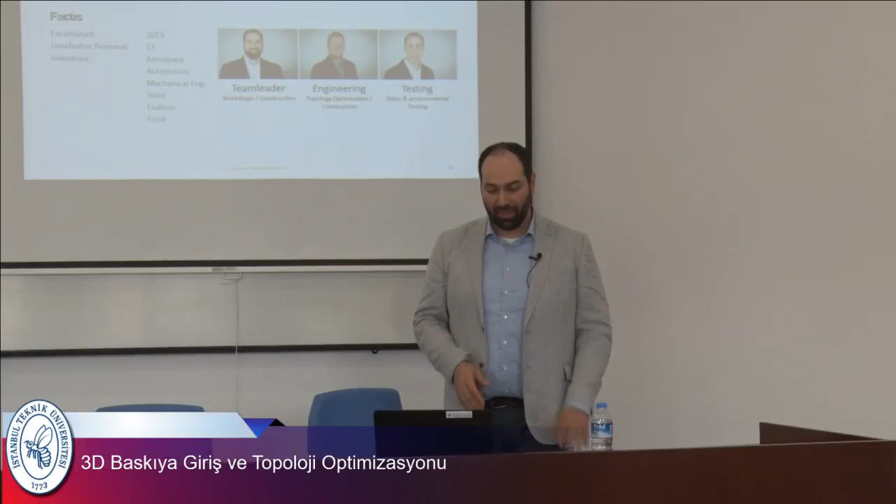I will give you a short introduction to how 3D printing works. Our services are split into 4 main parts. First, consulting, where we search for parts which are interesting for 3D printing, because not every part can be 3D printed, and sometimes it makes no sense to print it in 3D.

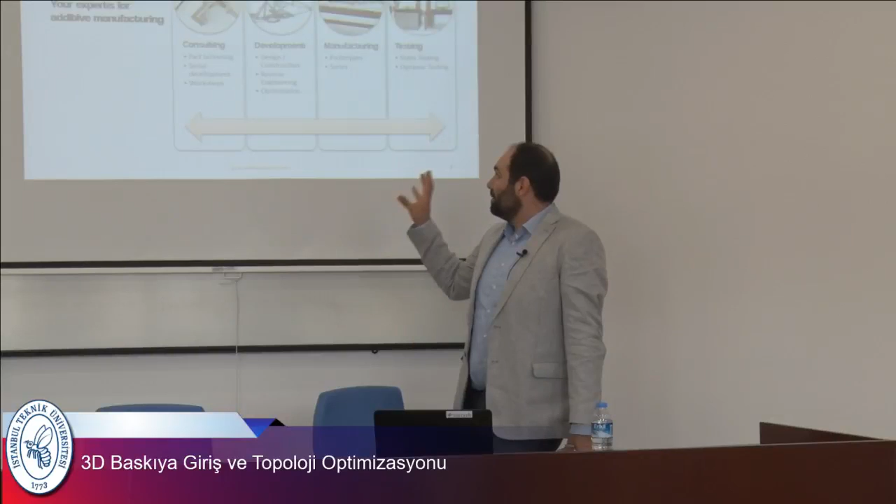We also do workshops and education, and we have development for design, construction, and so on. I will show you one part now and explain it in more detail later - this is a part out of the A380.

Airbus A380 - normally it looks like this, but it's broken in my baggage, so sorry for that. I will give it around. It's made of plastic; the original one is in aluminum. I'll give you more details later, but you can pass it around for now.

So what is 3D printing? In the end, it's not that complex. You're laying thin layers in a two-dimensional way and building a part up, constructing it layer by layer.

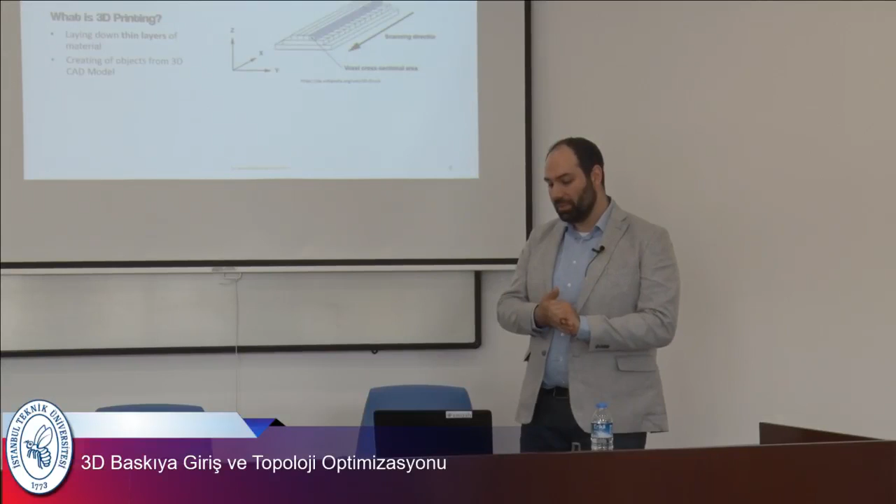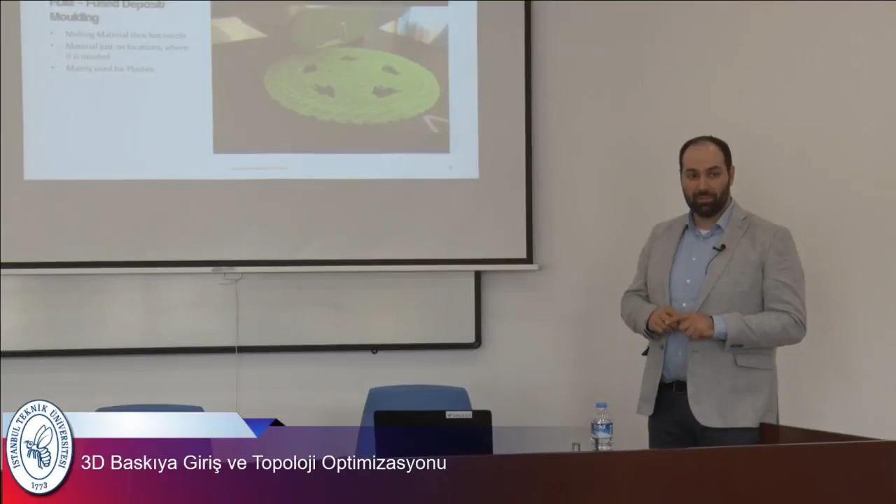To show you this, I have a little video, shown very slowly just to demonstrate how it works. You have a hot nozzle where you put plastic through it - has anyone of you ever used a hot glue gun? Yeah, so it's nothing complicated. You have this nozzle, you heat up the material, lay it down, let it cool, and lay another layer on it.

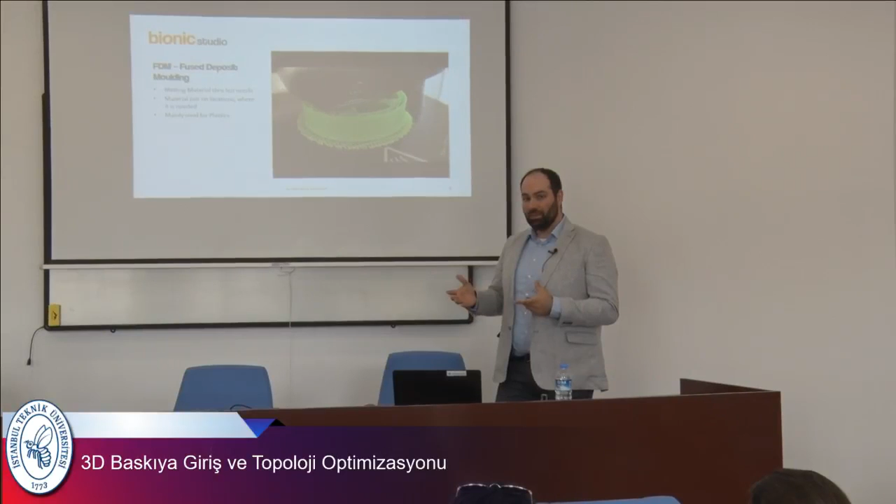If you do this layer by layer, you build a wall. In this case, I think it's a part of a tire, and you put material on the places where you need it. So you have subtractive manufacturing, where you do milling and drilling, and you have additive manufacturing, where you put material only where you need it.

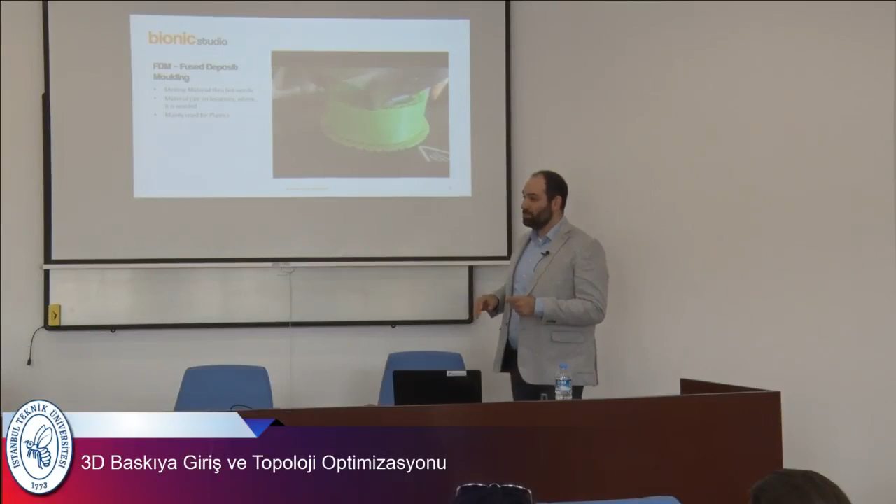This is one of the techniques, called FDM, fused deposition modeling. There are a lot more - another one is selective laser melting.

In this case, you have metal powder or plastic powder, and you shoot a laser at the places where you want the metal to be melted. You're doing this also layer by layer, and building the parts up.

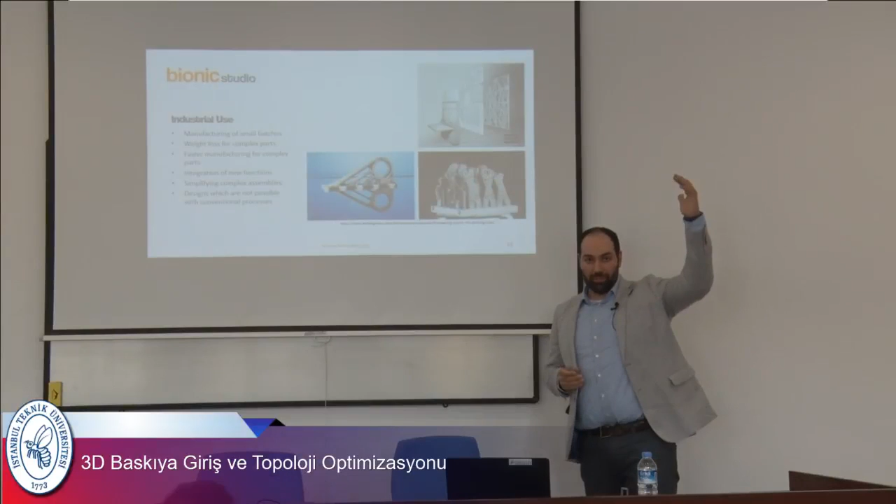You see here another part—this is the bionic partition. This was done together with the company Autodesk, and it's a wall which is quite high, around 2 meters, printed in parts. You see here the parts, and they connect it after the print.

Some advantages here: we have the manufacturing of small batches, and we can lose weight—for example, in this case it's around 30%, in this case around 40-50% weight loss. We can manufacture faster, more complex parts, because if you think about producing something like this conventionally, you will never finish it, or it will be really expensive.

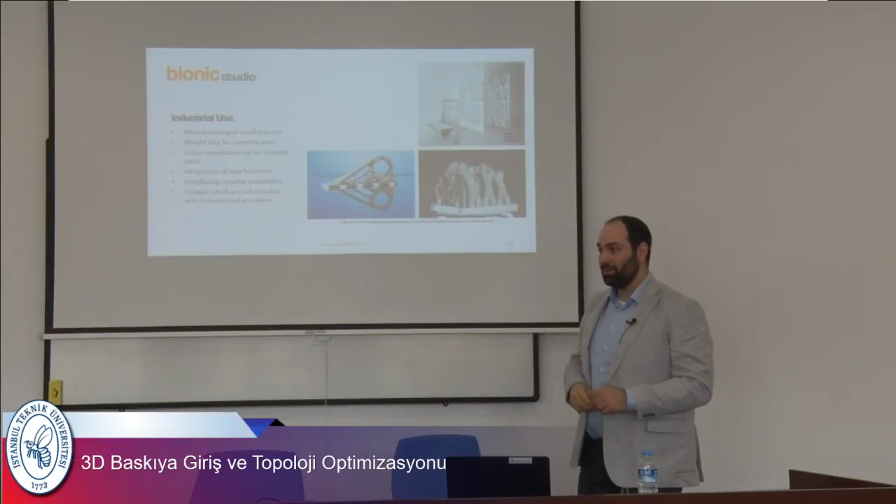You can integrate new functions, so it's no matter if you put a hose or something in it, and you can guide hydraulics or electronic cables inside, and so you can integrate these functions. You can simplify the design, and generally you can design stuff which is not possible in a conventional way.

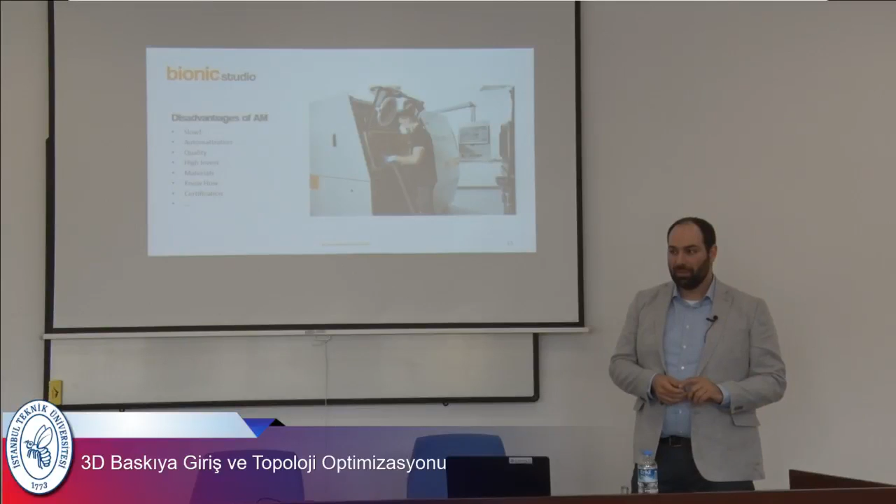But there are also some disadvantages. So this technology is really slow. To print something like the part which is going around, it takes on a normal FDM printer around 2, 3, 4 days. It depends on how good the quality should be.

And the second thing is the automatization. So you see the guy who's there with a sucker and sucks the powder out, having a mask on, and it takes time. So it's not a really automated process. Most companies are trying to automatize it more and more, but it's not like a milling machine which is finished and there's a KUKA robot which is touching this part and bringing it into the next. So this is not working right now for 3D printing.

And the quality, and if you see the part, I mean, this is a cheap printer. It's an FDM printer that we use, but it has not a good surface quality, and it has not the stability, and of course also the reliability. So it's not that you're starting one print in 2 different machines and you're getting the same results.

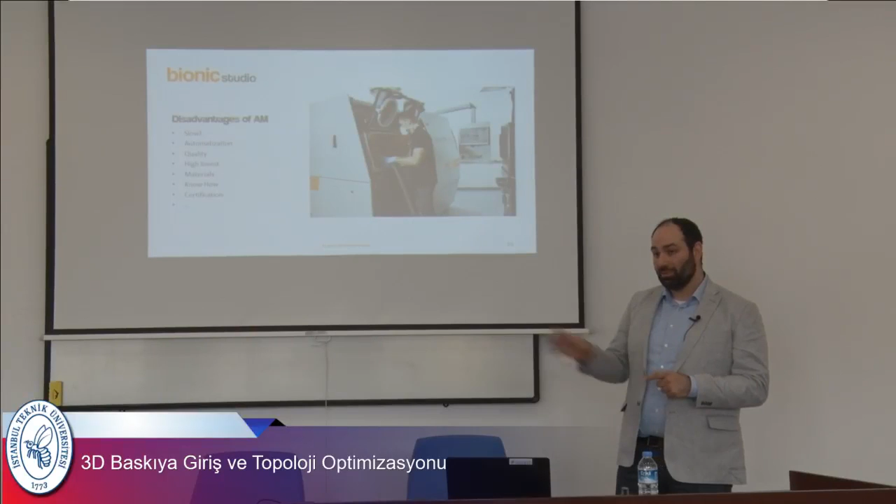You have a high investment, so for these machines you have to think about 500,000 euros and more, and the know-how. So the first thing I did before we started with 3D printing in our company, I just ordered 3 3D printers and told our employees, please, you can use it for whatever you want. You can use it for home use, you can use it for work-related stuff, whatever. And it was not that they started with it and directly got a part out of it.

So you really need a lot of know-how to understand how this stuff works, and how you get parts in a good quality and in a good time out of it. So especially for metal machines, most companies are saying you need 1.5 years to understand the technology before you can sell the products out of them.

And the certification. So in the aerospace field, it's quite interesting to have a certified part. So you need a certified material, you need a certified machine, and a certified process. And all the stuff is not done right now. It's not that you're buying a book and taking a look at it and know how the drilling speed should be and how the milling speed should be and whatever. This is quite experimental right now.

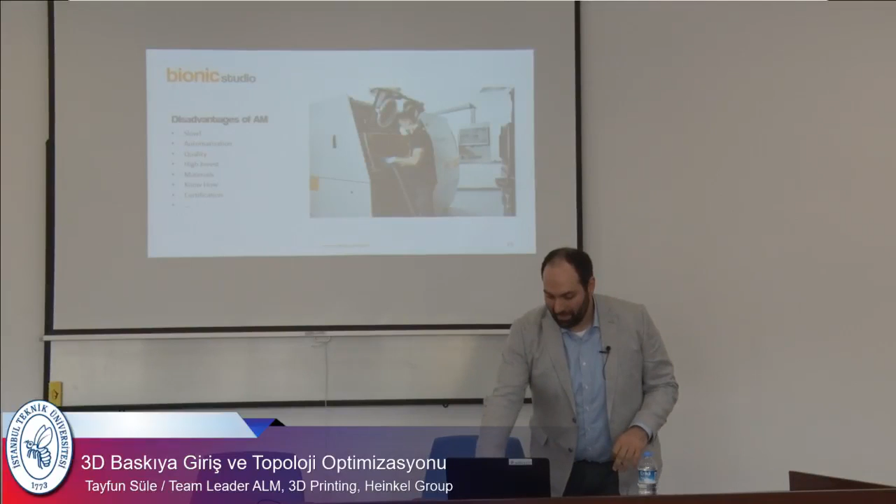The question is now, why are we doing it? Some of the advantages I already told. So the one thing is you can produce data out of the CAD work you have done. It's not that you have to switch it to a CAM language to feed a milling machine or whatever. So you can directly use your CAD files, put them in a 3D printer, and print.

In small batches, as I already told, reducing the development time. So you can produce different types of product in a very short time and test it before you're going to do it bigger. So you can reduce your development time with this. You don't need tools. So if you want to produce a plastic mold or something, you need time and money for it, and this 3D printer doesn't need molds or tools.

And one of the main things is you have the geometrical freedom. So you can decrease the weight, you can increase the functions, you can build up complex structures, and you can substitute parts. And this is the reason why I show this part, which is going around right now. These are 5 parts that you are able to substitute.

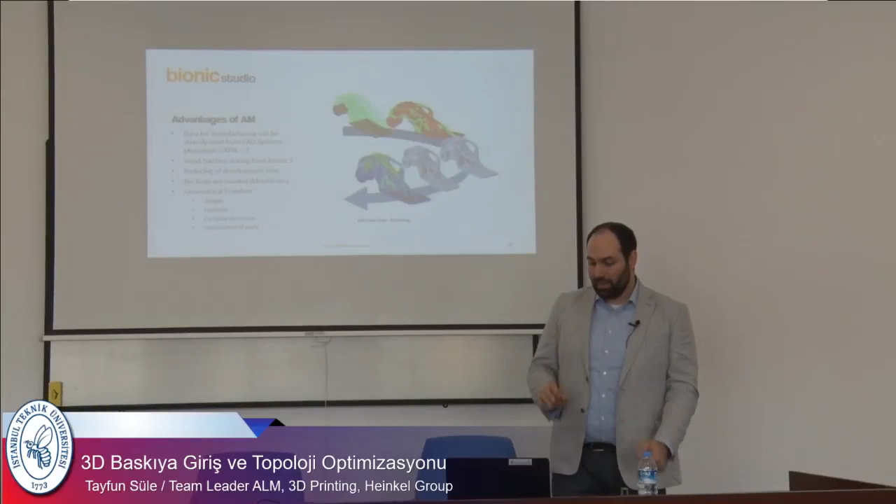Some people ask me a lot if the 3D printing machines will substitute the milling machines or the drilling machines and so on. My feeling is that it will never substitute some other technique. It's just a new way to produce something. And let me show you this.

So if you have conventional manufacturing with milling, for example, if you produce a plate, it's really easy. It's not that complex, and the price is also not so high. But if you want to produce something really complicated, the price is going higher and higher. For additive manufacturing, there's nearly no difference. For the 3D printer it doesn't matter how complex the part is. So you always have to think about which way you go, and you have to compare: is it better to print it, or is it better to mill it?

And at this point where both lines are crossing, you're starting with what we call complexity for free. So from this point on, it doesn't matter how complex your part is going to be. You can print it because it's mostly cheaper than creating it the conventional manufacturing way.

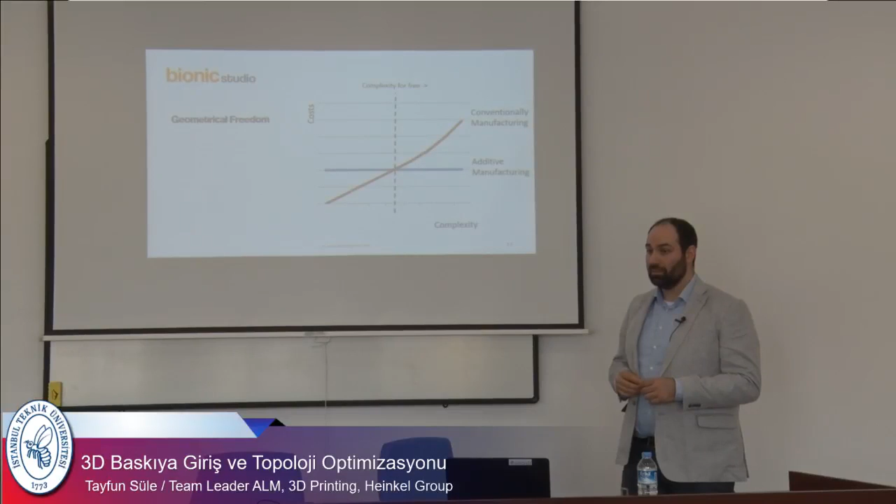Let's come to this part. I will show you one example. Most examples I cannot show to you because we are just an engineering company, and customers come to us and ask us to help solve their problems. So we don't have our own products. So this is something out of a bachelor thesis. And this part is hanging in the A380. It's on the top, and it's holding the oxygen boxes, which you have over your head.

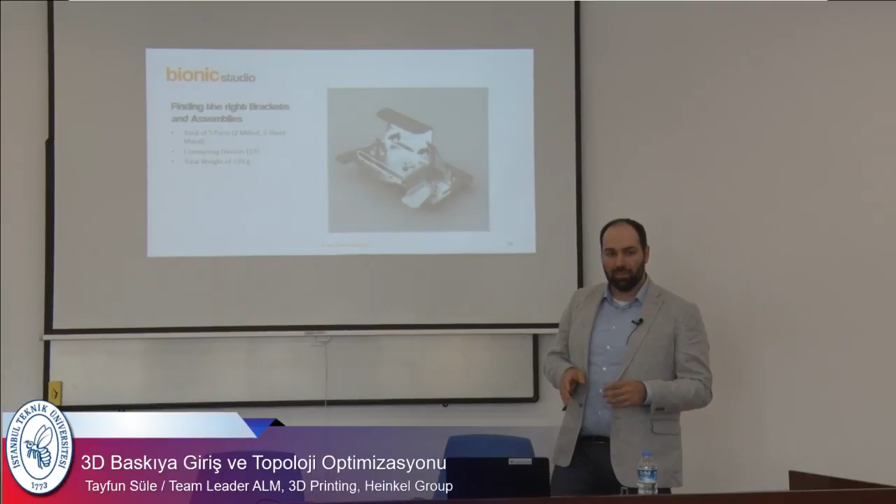And it's 5 parts. 2 of them are milled parts, 3 of them are sheet metal parts. And it has 17 connecting devices, like rivets or nuts and so on. And the total weight is 239 grams, originally from aluminium. And just to keep it in mind, the price of this part, complete, is around 60 euros, just for the parts themselves.

And what we do first is a topology optimization. I think you already had contact with topology optimization a bit. Has somebody of you heard of topology optimization? You also? Okay, a few of them. I will show you a few examples later. So what we do in topology optimization: I will go one back. We have this part which is really complicated. It is connected here and it has connections here and so on.

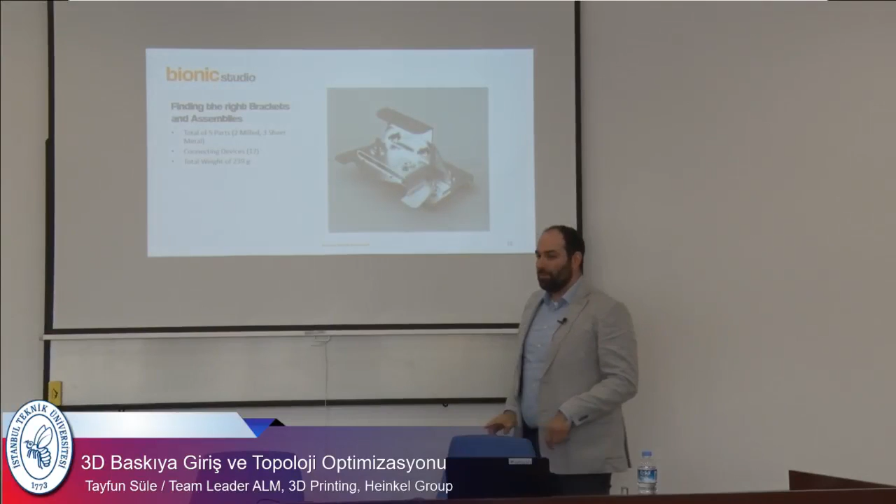And what we're doing first is to create a design space. We will do it later on an example. So we create this design space, this grey area. And the yellow areas are areas where we're telling the program that these areas can't be changed because there's a force on it, there's a connection on it, and it must stay for quality reasons or whatever. And this program is doing one thing: it's thinking about how the forces can flow through the model to the points where it's needed.

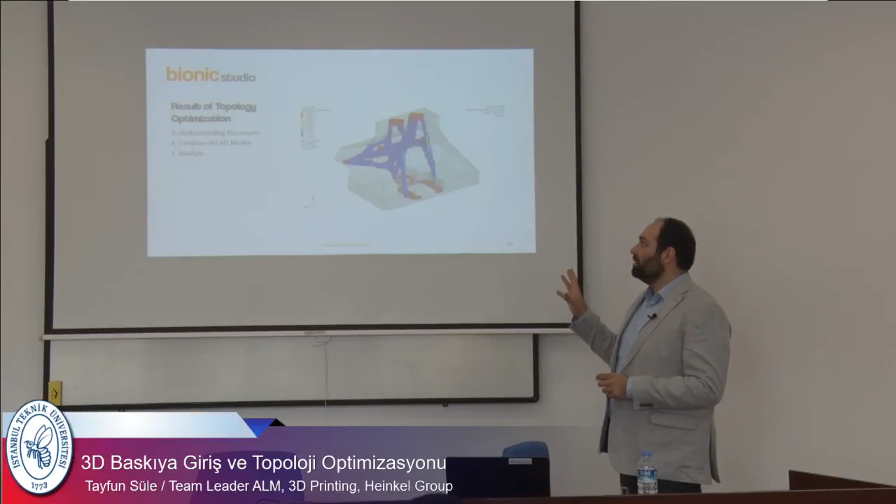And mostly something like this comes out. This is what the topology optimization gives us as a result. And from this one, we can start to create a CAD model. And this can look like this. I have it here with me. It's an aluminum part. I will also pass it around.

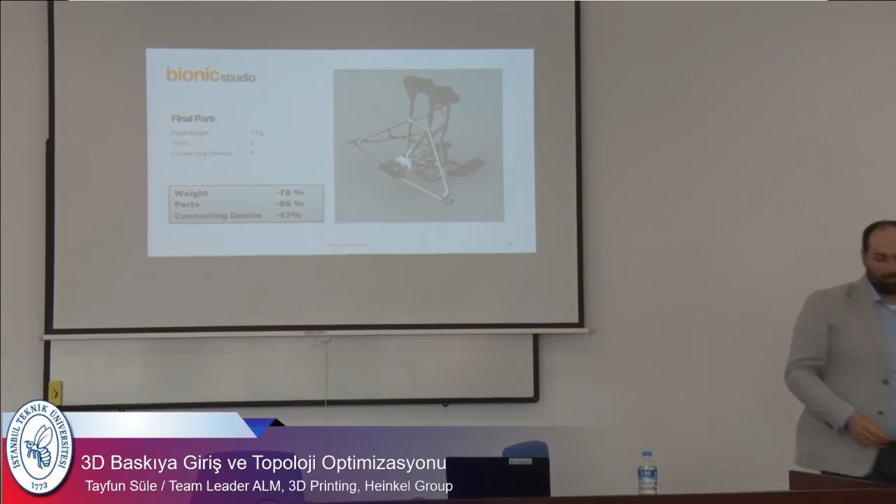So what we have done is we substituted 5 parts with 1. So we have just 1 part, and it's just 53 grams. In this case, we save nearly 80% of weight. We save parts and connecting devices, so we have fewer connections. But the cost of this part is around 120 euros. So it's double the other parts.

What you keep in mind then is there's no guy sitting there assembling all the parts together. There's no one trying to take the tolerances and check if everything has the right tolerance and so on. You have less logistics, so you don't need to order 5 parts. You just have to order 1 part. So if you keep this stuff in mind, it can be that this part is cheaper than the old one. So this is the reason why it could be very interesting.

And yeah, let me think about it.

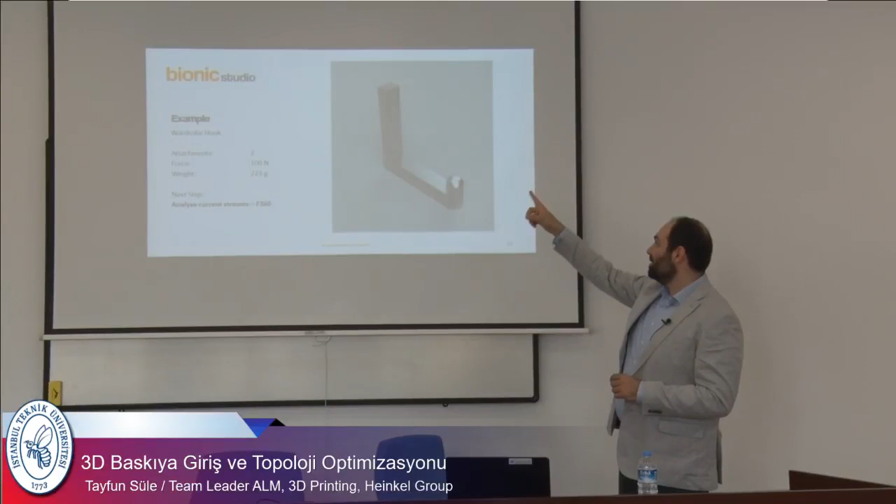Then let's come to the point where we have a little example. The flight from Hamburg to Istanbul is about 3 hours. And in the plane I was thinking about a wardrobe hook, where you put your jacket on. And I designed this wardrobe hook, and I was thinking, okay, it has 2 connections. We have here a force of around 100 newtons, and we have a weight of 200-something grams.

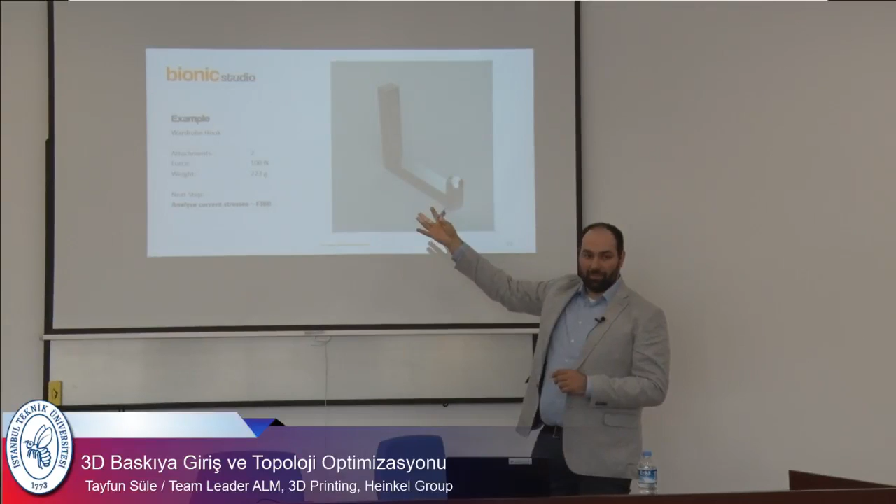And I will switch now to Autodesk. Just a second. Has someone of you already used Autodesk Fusion 360? You used it? Does someone of you know Autodesk Fusion 360? A few more. Okay, it's quite an interesting tool because there's different stuff you can do. I'm sorry because my version is in German, but I will try to explain it.

So we have the model component where you can design something. You can design shapes. This doesn't matter for now. You can render stuff. You can animate stuff, like an explosion view or whatever. And then you have simulation, and this is quite interesting because most tools, like for example CATIA, don't have everything inside. What kind of software are you using for design or analysis? Can someone tell me? SolidWorks. Tinkercad. CATIA maybe also, or Siemens, maybe Siemens NX. Okay.

The good thing with Autodesk is you can have everything together in one program, because previously we had to design something with CATIA, then export it, put it in Patran Nastran to calculate it, then put it back in Siemens NX for the final designs, and it always depends on our customers.

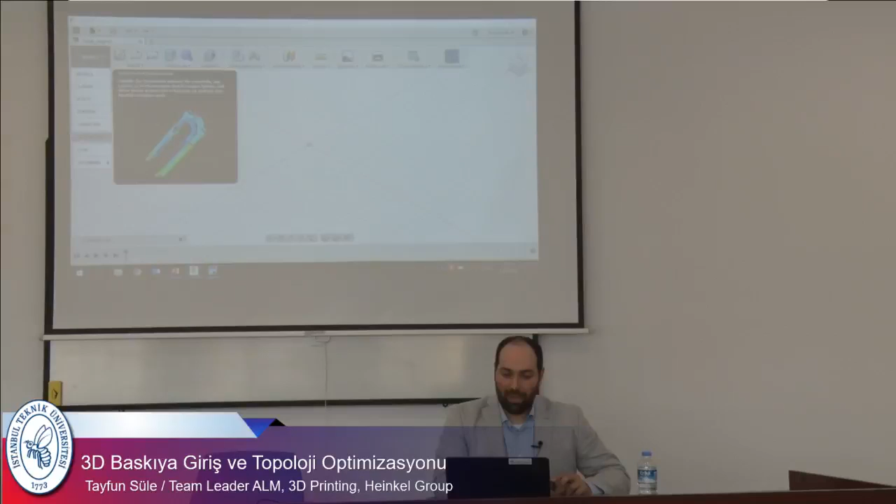And what I'd like to do from scratch now is to create this wardrobe hook. It's quite easy. So we have this sketch tool, choose a plane. I have to say something first. I've been using it for half a year, and I never got a workshop or anything on it. Everything I know I've done on my own. So it is maybe showing how easy this program works. So what I do here now is to create this wardrobe hook.

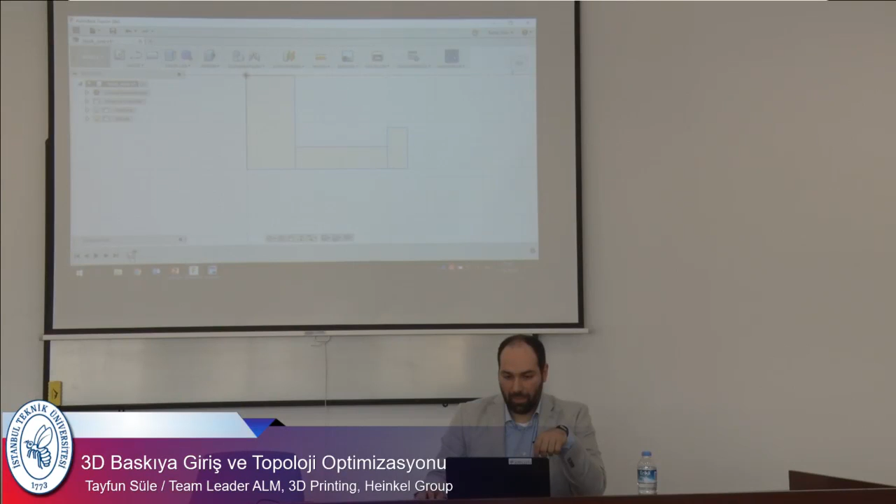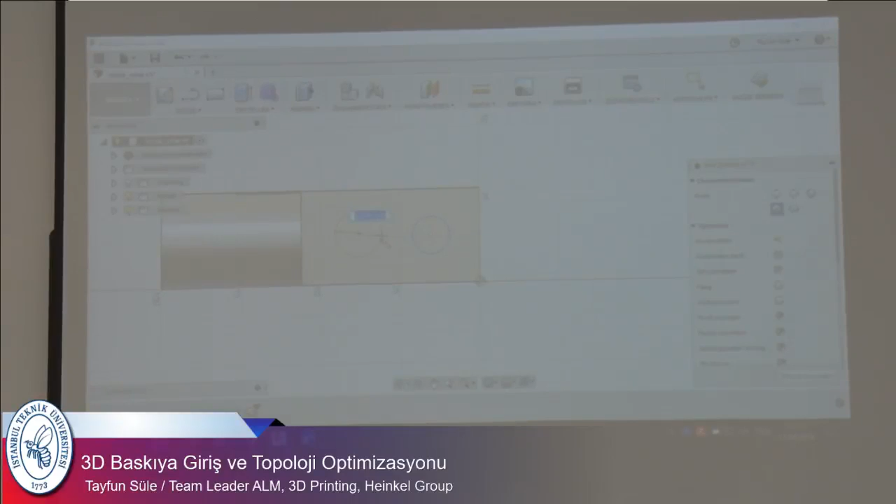Maybe a bit too much. So, and it's maybe not. And then we need 2 holes here. It's not symmetrical, sorry for that, but it's just to show you quite fast how it works. So, finished.

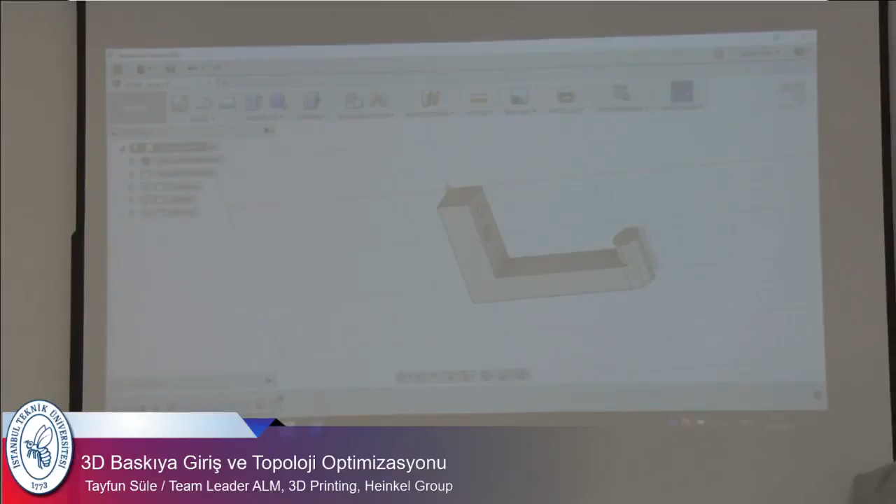Who was it who used CATIA? You use CATIA. How long do you need to do this, same operations? 3 minutes, okay. I've done it in 40 seconds. So, and it's a really easy part. So it changed a bit the way of designing something. It's not as complex as other programs.

And this is quite interesting for us because our engineers are mainly calculating something, doing CAE analysis and FEM analysis and so on, and they don't have an idea how CAD works. In our office, one side of the office is doing design and the other side is doing the calculations.

Previously the designers designed something, gave it to the calculators, and they said, oh, it's completely shit what you have done, and gave it back to the designers. Then we had these loops, sometimes 3, 4, 5 loops, and they don't really speak with each other. What we have done now is to give them Autodesk Fusion and tell them, it's quite easy, put your design on it, do a little calculation so you have a first idea how it works. This is working quite well, and we're turning fewer loops.

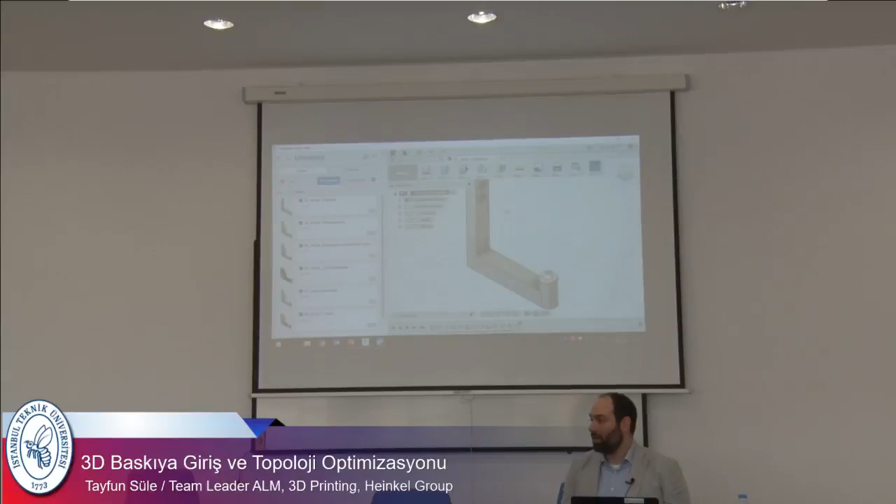And I will go back to the presentation. The next step would be to analyze this part. I will open the next version. So we have here this original. Why do we analyze this original part? We'd like to compare it later with the 3D printed part. So here's the part again.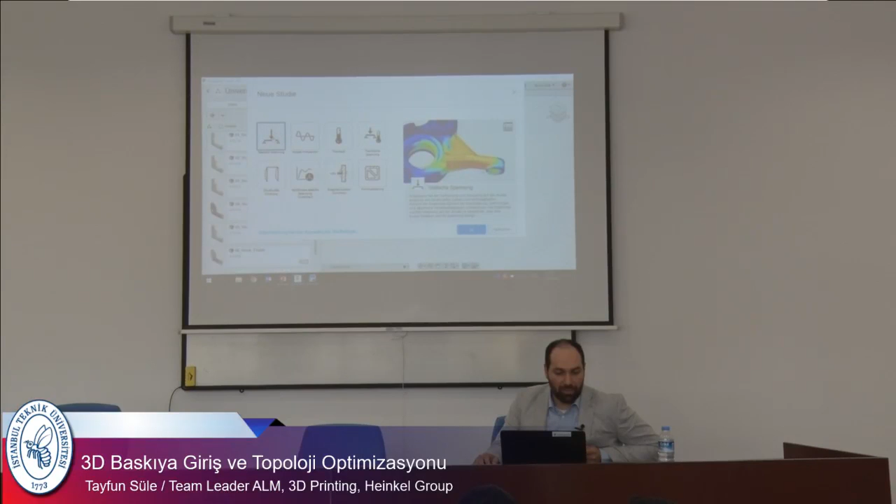To analyze something, we can go to simulation, and you have different types of simulation. You can do thermal analysis, you can calculate the frequencies, nonlinear stuff, and also topology optimization, or you can do the normal static analysis. And this is what we would like to do now.

In this case, we're starting from the left. So first we have the material. There are a lot of different materials inside. You can change it to other materials. You can create your own materials. I will leave it like it is.

Then we have the boundary conditions. In the end, we have here both rivets. We can just use them to create boundary conditions. In this case, it's fixed in all directions, so UX, UY and UZ. There are also possibilities to create boundaries which are sliding or fixed at a degree of angle, and then we have a force here.

It's the next one. We can just choose this one, and we say this is 100 newtons, and I will change it a bit. So 5 degrees in this direction, 5 degrees in this direction, because you never pull on a hook really straight in one direction.

And right now we have more parts. I will show it to you. So this is the body. We have the hook here in the front. You have hole 1, hole 2, and this is the topology optimized area.

And we're doing this contact simulation. So it is automatically creating a mesh between the parts. And then you can go to the results, and it's also quite interesting. You can do the analysis in the cloud, where there are really big computers. I think it's Amazon services or something. So you have a lot of power, especially if you have big calculations. In this case, I will do a local analysis because for this case it's totally enough.

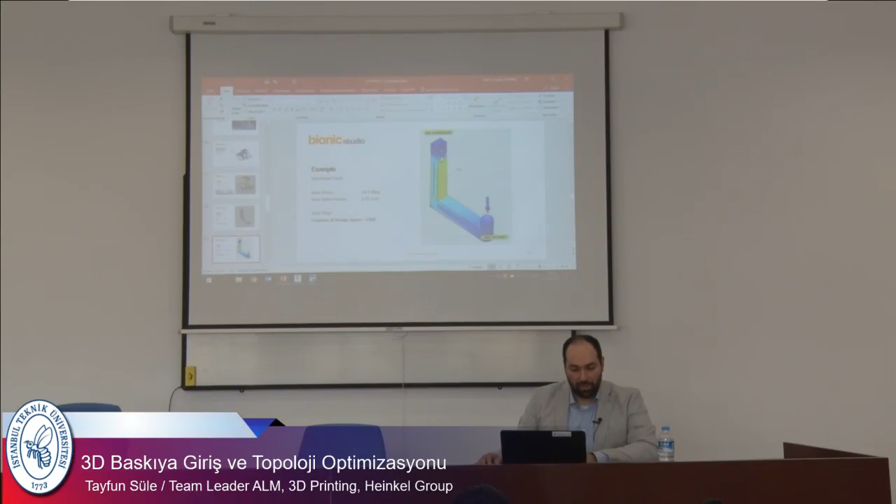If you'd like to do a topology optimization right now, we need to know that we are able to find a way for how the force goes from the attachments to the point where the force is introduced. And usually you have more space which you can use for the design space. So like for this bracket, what you saw before. In this area, for example, are some cables where you cannot create a design space, but in this area you have a lot of space where you can change something.

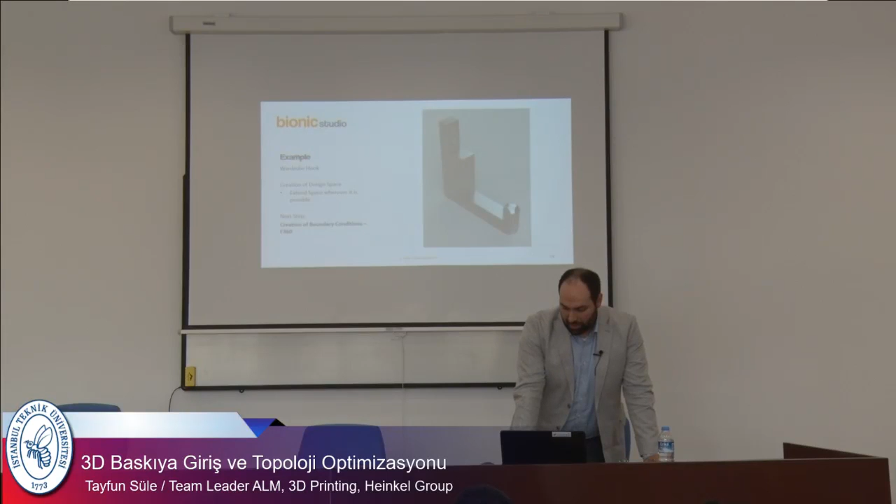And to do this, just a second. For example, I was just thinking about something like this. So we can just extend this surface. By creating... so now we have a bigger area.

So, for the topology optimization, it's the same as for the analysis itself. So we have to create the boundary conditions first. We go to simulation again. In this case, we'll do a new study and say topology optimization, and we're starting from scratch again. So we have the materials, I'll leave them like they are. We have the boundary conditions. It's the same as for the other one. And we have the force here in the front. Again, 5 degrees. Okay.

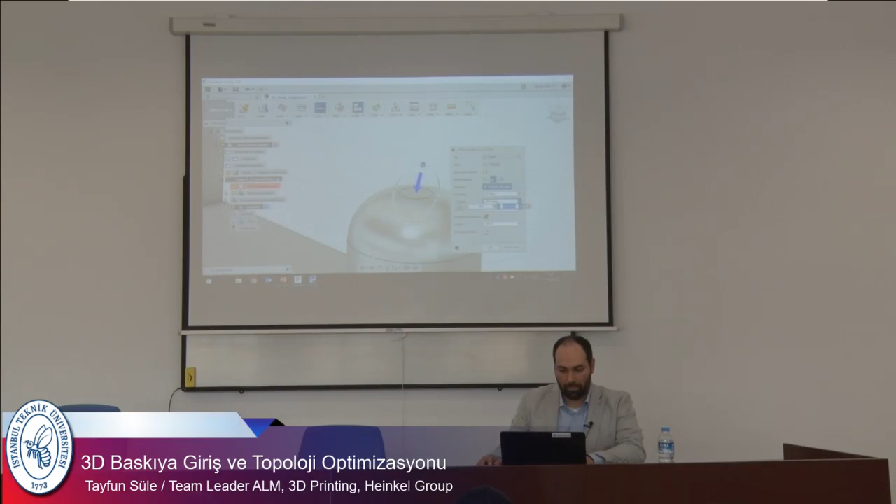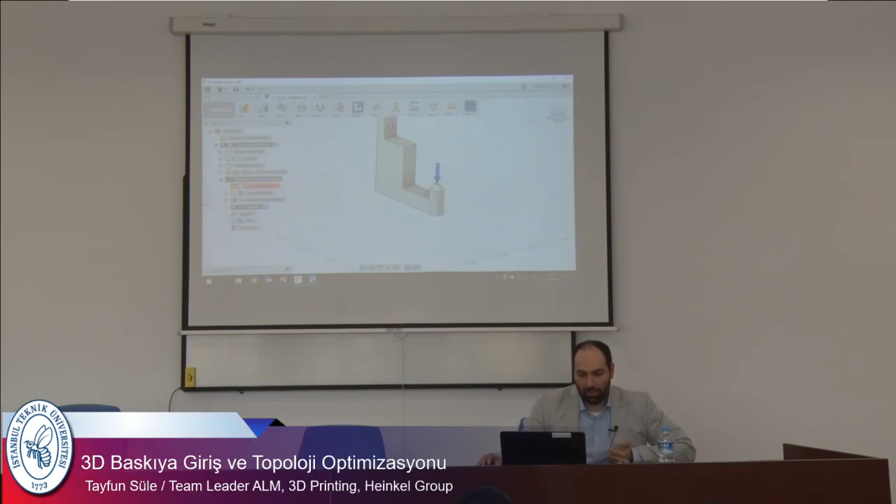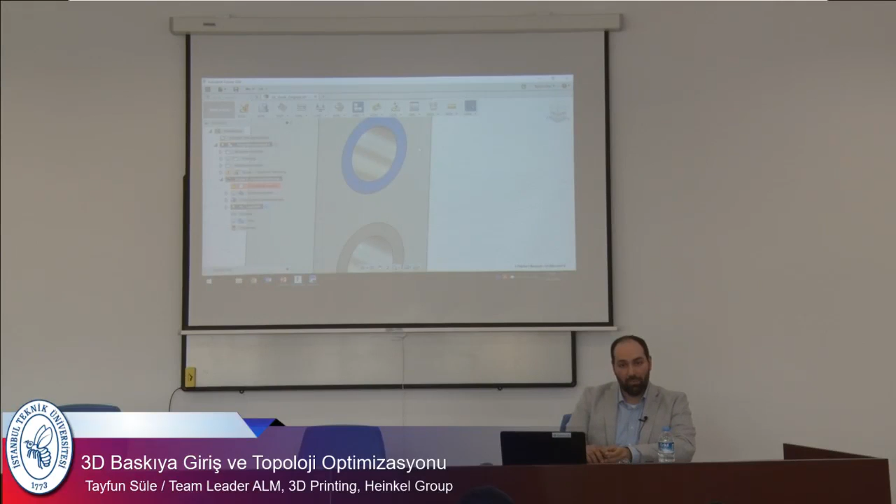So, this is already created. This is the force. And maybe you ask yourself why I've split the holes. There it is. So I split the holes in two parts. So we have this one part and this one part. The reason is, if you'd like to do a topology optimization, it goes through the whole part which you set as the goal. And to set up the goals, or to tell the program what it should optimize and what not, we have to give it a goal. So we're saying that this part can be optimized, and the other part should stay like it is.

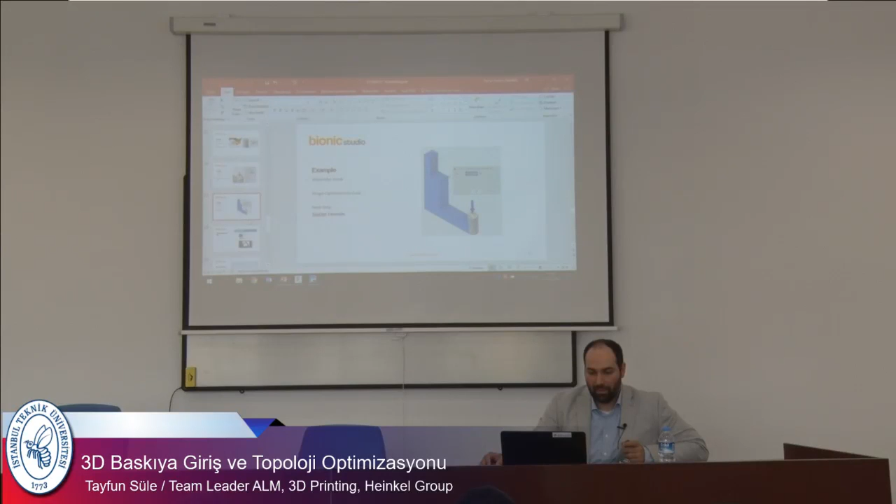And if you choose this one, you're basically finished, and now you can choose to calculate it. In this case, it must be in the cloud because it's a really high and complex calculation running in the background. And I've already done it, but before we do it, just a second. I'd like to show you something about topology optimization.

I think every one of you has a smartphone. Do you know the app TopOpt? No? If you like, you can just download it. It's free, it's quite easy, and it's not so big, so you can download it very fast. And we will do a little example on your own, and we'll see if everyone can imagine what it brings. So topology optimization, if you see it like this, it's quite easy.

So there are different methods of topology optimization. If you have a box full of little squares, and you're applying force to one side, and maybe some of you have already seen results from an FEM analysis, where you have blue areas and red areas. So the red areas are critical areas, the blue areas don't have force on them. And this method for topology optimization is called the SIMP method.

It's trying to find the areas where no forces are attached and give the expression in densities. And it's doing it in very few steps to create a part which is just withstanding the loads on this point.

Has someone of you already downloaded it? Yeah? No? Okay. If yes, this is the optimization task. So it's quite easy. I think every one of you has done it already. So we have a fixed point here. We have a point which can be movable here, and we have a force attached to this point.

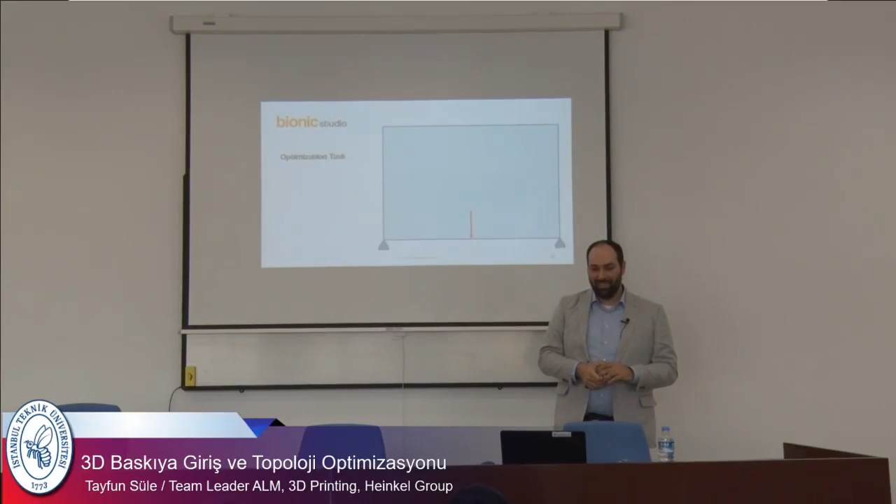And if you run this problem with this program, it will automatically give you something like this. And this looks quite like a bridge. And topology optimization is also nothing new. They have used it for years, but now it's possible to create parts which are really complex with a 3D printer. And there are already some companies which are trying to build bridges with 3D printers. It's quite interesting to see, but this is a bit too big for this, I think.

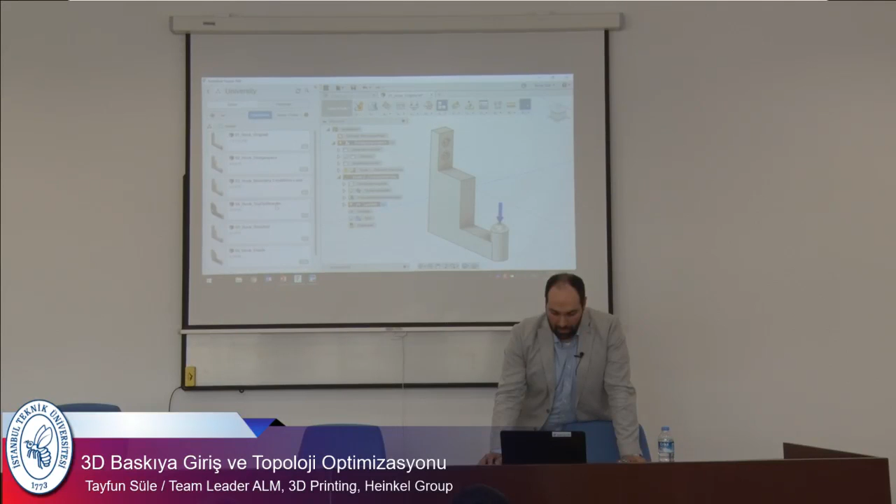And you can play around later. I will give it in a presentation. So, let's assume the boundary conditions. So after you created this topology optimization, you will get something which looks like this.

So in the end, we have this whole area where this topology optimization can create something, and in the end it says we don't need material on this corner, we don't need material on this corner, we don't need material inside. And if you turn it a bit, you can also see there's not much in this area. And also the connection to the hook itself could be much less. And what you also see is there's no material connected to the upper hole. And this is an indication that maybe it isn't needed anymore.

So this is also what we see a lot, that for some parts there are a lot of connecting devices to the frame or whatever, and mostly you don't need them. It's just because someone is saying maybe it could be needed. But in the topology optimization, you can see it quite well at this point.

And what we do then is to bring it into the design, and we can leave it like it is now, but it doesn't look really good. So if you give something like this to your customer, they will say, okay, nice, but it looks really terrible. It has holes inside, and it's not straight, and our customers won't like it. So you have to create a good design then. And take a look at it here.

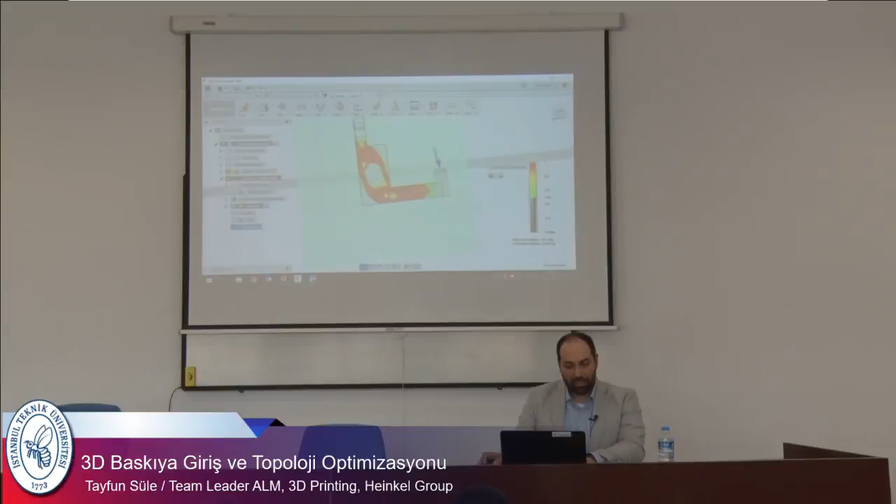In Autodesk, I will just show you very fast how it works. So you can just create a plane. Just a second. So now we have this first stuff, and then we can go through it and create.

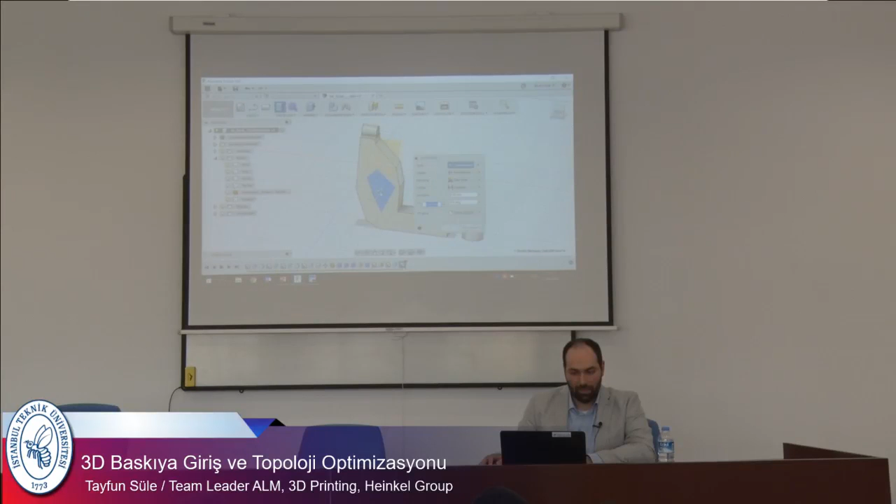It doesn't look really good, but I have a prepared version, so you can go on like this, and I will open the prepared version. This is what I have done in the plane. It looks like this, so it's empty here.

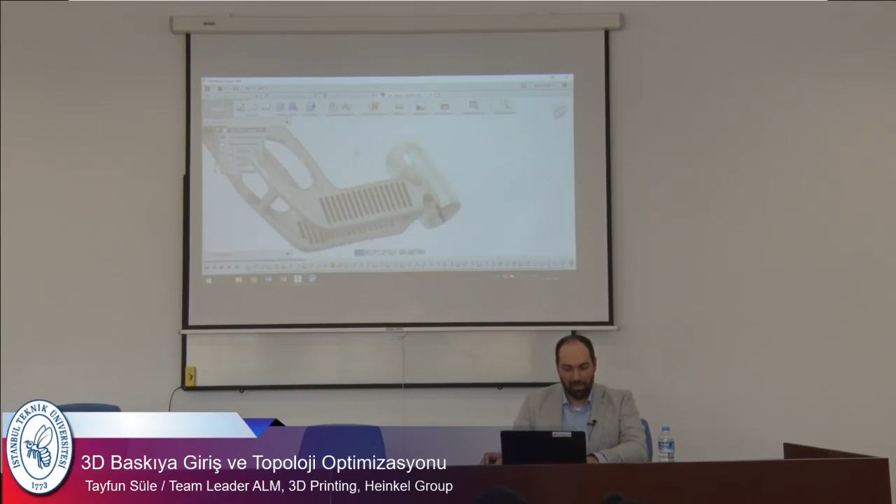It has this connecting here. Did any one of you already create a CAM routine to mill something? Maybe not, okay. It's quite interesting because when you think about how to produce it in a conventional way, there's no way to go inside this part and mill something out here, and also this area, so it's not really easy to do.

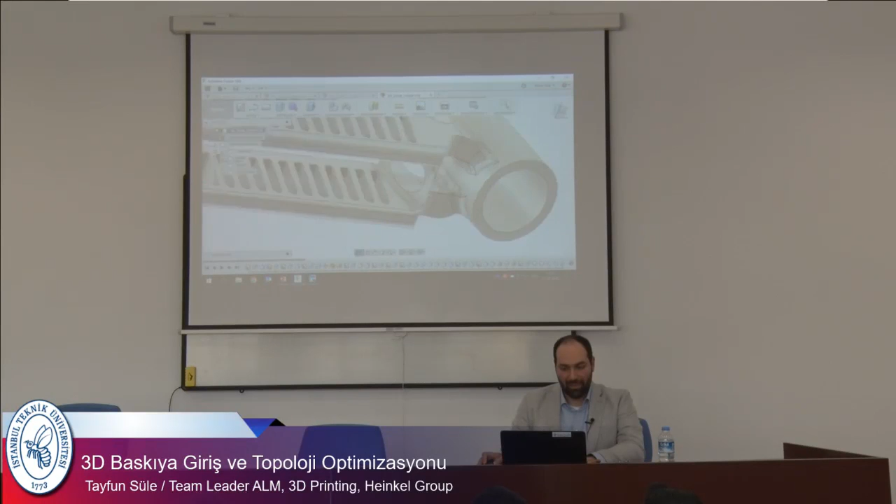And here I have it, so we have the same steps. In this case we just have one attachment instead of two. We have again 100 newtons and a weight of just 77 grams. And what we have to do then is analyze it again.

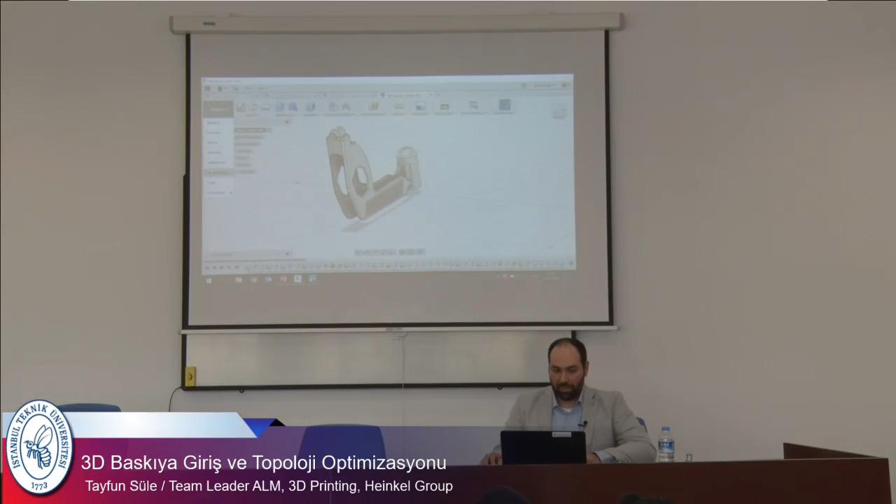I already prepared the simulation here. So we have the analysis. In this case, we can see we have now a bit more stress at this point, but it doesn't matter because the material is good for around 270 megapascals, so it doesn't matter in this case. And we have a displacement of 0.1, and if we compare this to each other...

By doing a topology optimization on just this one part, we saved around 65% of weight. The connecting device is just half, and the max stress is a bit higher, but it doesn't matter for this part. The most interesting thing is we get material out of the part and increase the stiffness, so the deformation is minus 68%. Before it was 0.33 millimeters, now we just have 0.1 millimeter.

So by taking out material and thinking about bionic structures, we could improve the deformation at this point, so it doesn't move that much like before.

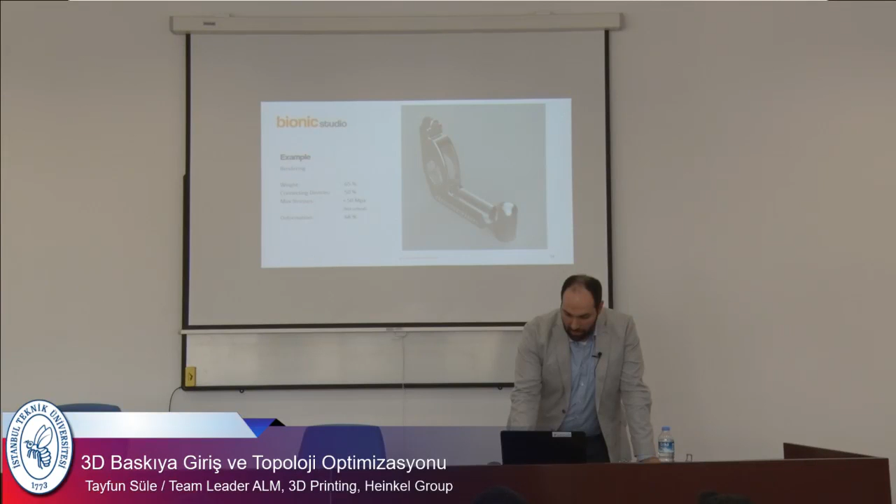One of the last things I'd like to show you is the rendering. This is quite interesting with Autodesk. You have this tool, you can go to rendering.

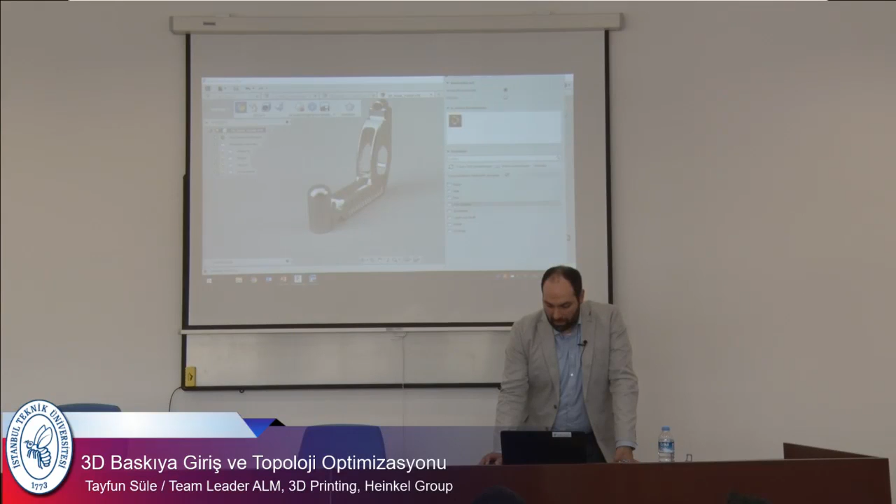It's always good if you have good customers to render the pictures before, because it looks more realistic. It's quite easy, you can render it with a quick tool, or go through this point where you start rendering pictures and choose different types of materials. Right now it's metal, but you can also choose leather, for example, or I'll take water, because it looks always interesting.

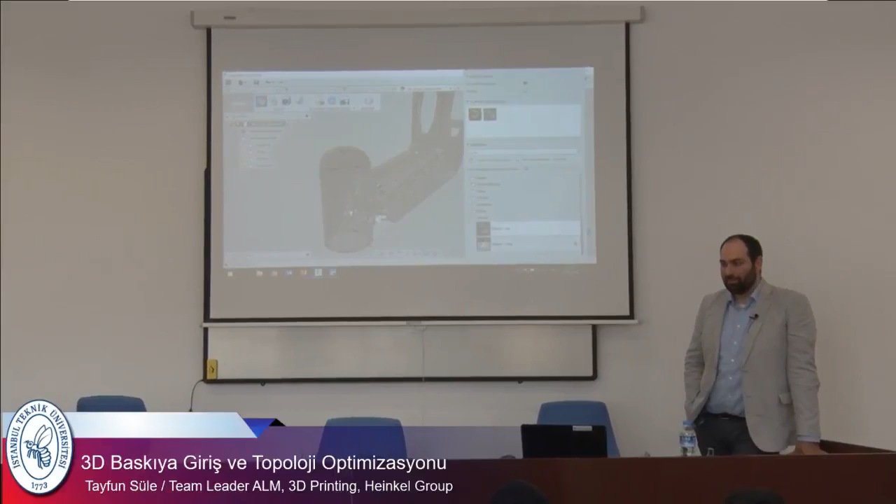It takes a bit, but then it starts to render the stuff, and you have cool pictures from it. Also, if you have assemblies, you can create an exploded view where you can see all your parts getting inside. I'll leave it running because I'm more or less at the end.

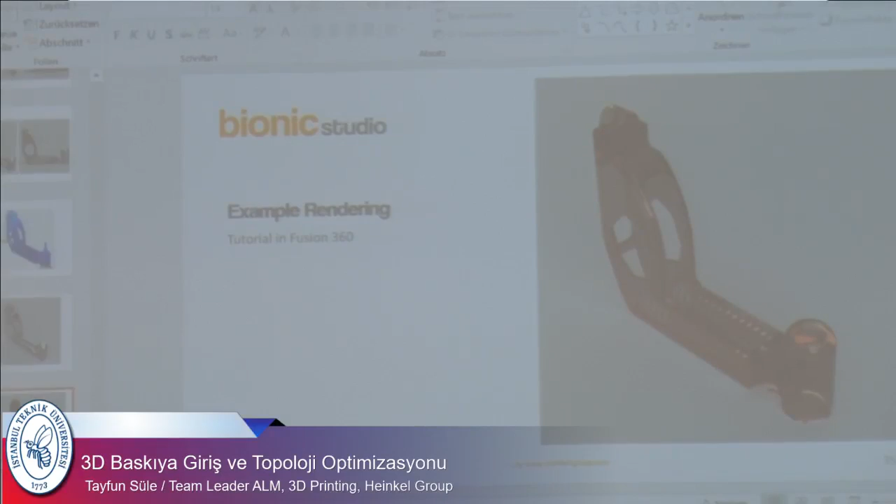So this is, for example, a red glass, and that's it.

I'm open for discussion or questions, and hopefully it was not too fast and understandable. You can ask your questions in Turkish if you want, I will understand it, and I'll try to answer it also in Turkish.

Okay, any questions already? So what was the reason for... You will get a microphone.

So in your topology optimization design, you have the angled empty slices, right? Why are they angled instead of straight? I've done it in a plane, and I was thinking that straight lines are looking quite easy. This is more or less a crazy idea of myself. I could also choose another angle, another way. But in this case it's counterproductive for the stiffness. If you do it to the left, it will increase the stiffness a bit at this point. I'm not sure if there's an example from nature, it was just a really sharp idea for me.

And the question is about the ceramics you mentioned, ceramics additive manufacturing. Do you have concrete examples of them being used, for example, in the dental industry, that rely on ceramic parts made out of additive manufacturing?

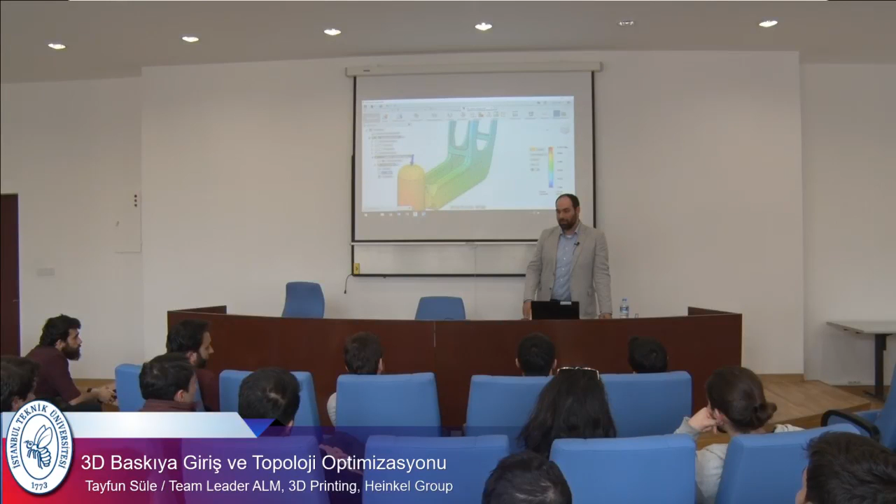It's quite good. We've done some tests against Patran, Nastran - another FEM program we use a lot - and it looks more or less the same. Actually, the underlying engine is Nastran.

Yeah, this is maybe a good point. So in the background, the calculation itself is created by MSC Nastran.

Thanks for your presentation. Welcome.

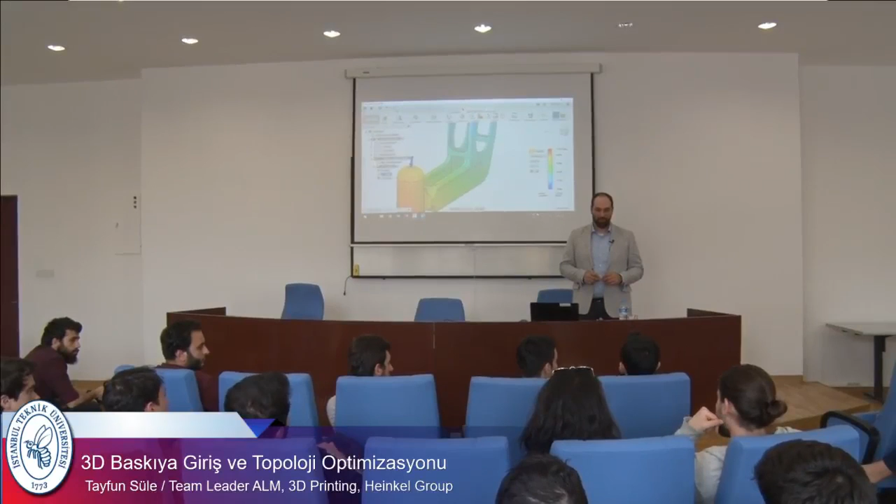We access the boundary condition. So what about the design limitations, the manufacturing limitations? If I want to manufacture with injection molding, how can I access the design and manufacturing limitations?

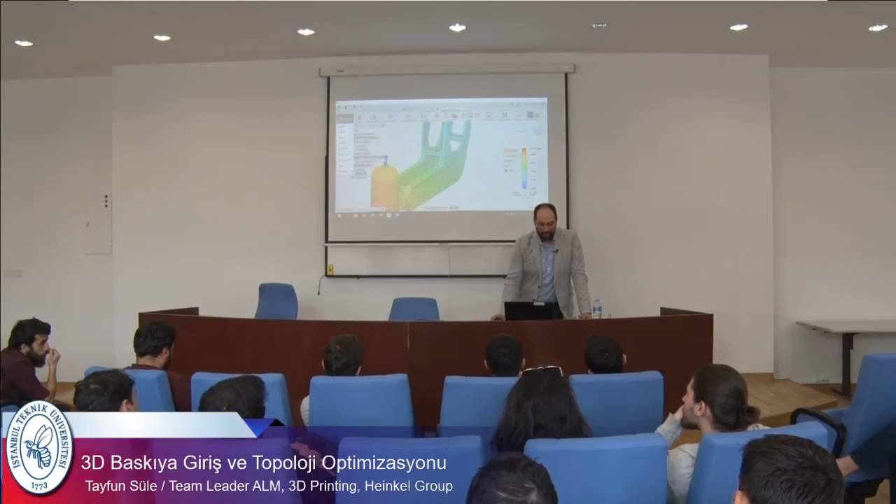I'm not so sure about the limitations for injection molding. I think this is not really covered - I have more knowledge in 3D printing, so that's the reason. You have here this CAM part where you can create stuff for multi-axial milling machines and drilling machines, but as far as I know, there's nothing to build molds or anything for plastic injection.

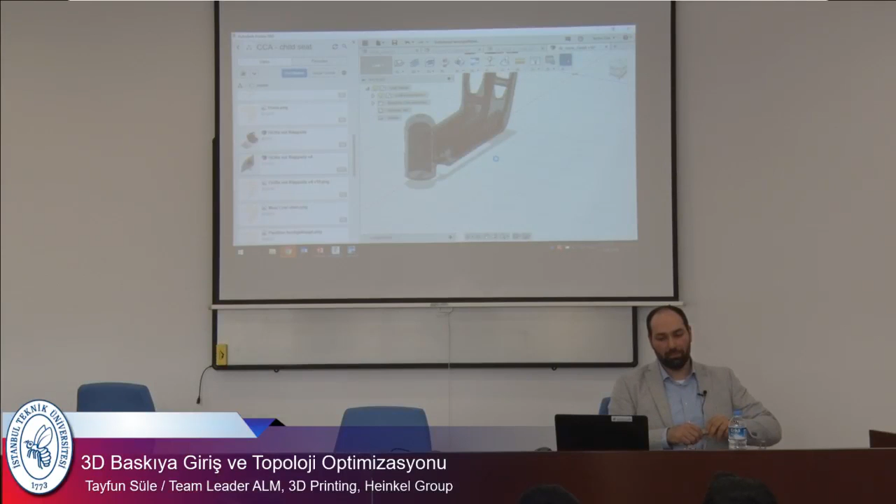What we're thinking about - this is a project we did together with another company - what we did here is this partition of a plane, and we thought about creating something like this which is foldable, where you can put your child during the start and the landing, and then just fold it back up after.

The good thing with Autodesk is you can collaborate with others together. In this project there were different people working on it - in this case, three - and everyone can create a part of it, so you're working together. If you have an assembly, you can assemble everything together, and if someone changes a part, it will automatically update. Or if you have someone who's the expert in calculation, he can do the calculations while you do the design, and you can split the work much more easily, and it doesn't matter where you sit.

So if, for example, someone of you would like to work or have a project with us in Hamburg, it's no problem to share the data and work with Autodesk Fusion via the internet and the cloud. This is one example that might be interesting to show you. Every year we do a competition at the university where we have a part like this here.

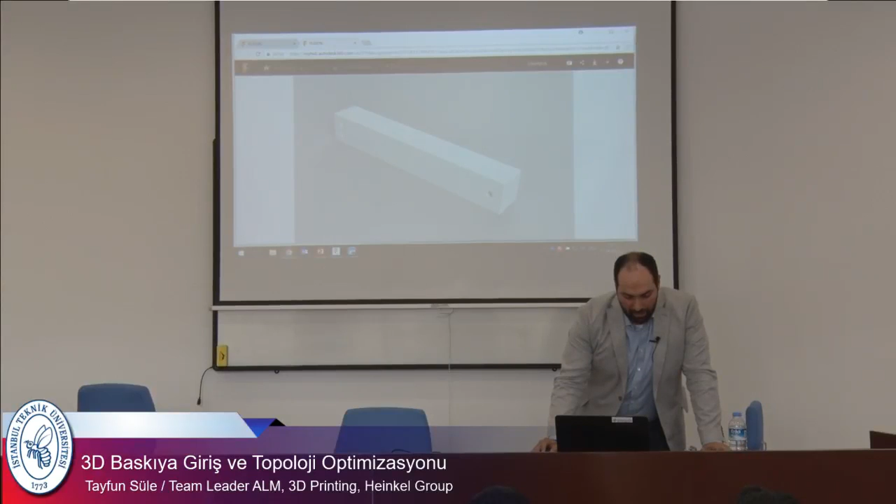The goal was to decrease the weight while holding the stability of this part. For example, the students all worked with Autodesk in this case, and these are the results.

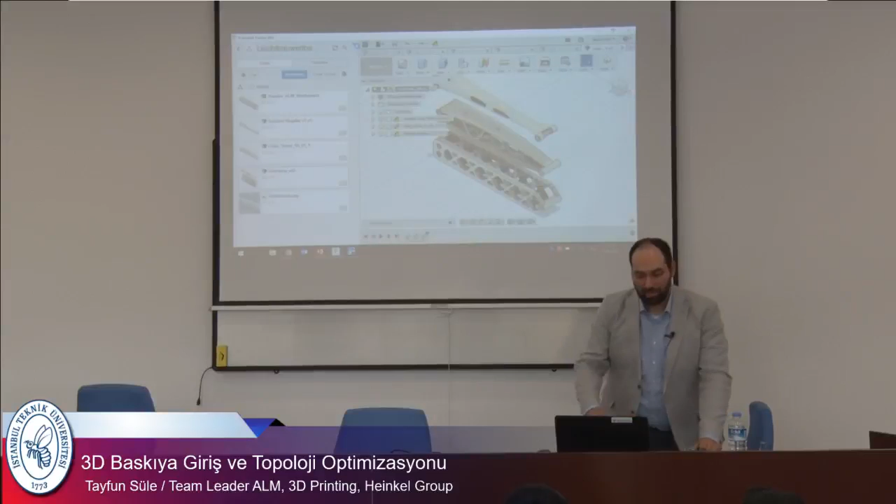Every team had the chance to ask us questions, and we shared this folder together so we were able to answer these questions. And here you can see the parts now.

It was quite interesting because the team on the bottom line were mechanical engineers from the architecture branch, and they were thinking about structures like bridges - in German it's called Fachwerk - where you have this structure inside. So this is their design.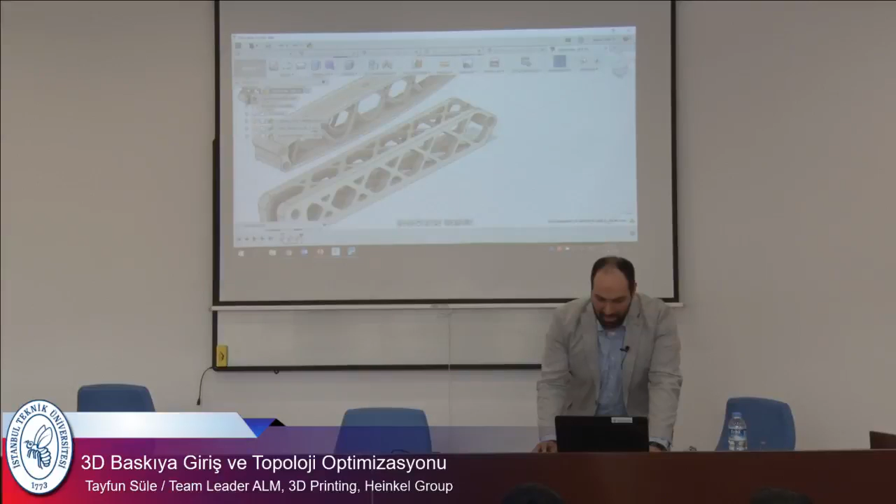And this team were aerospace engineers, and they were thinking about birds - how birds fly and how the forces can be transmitted.

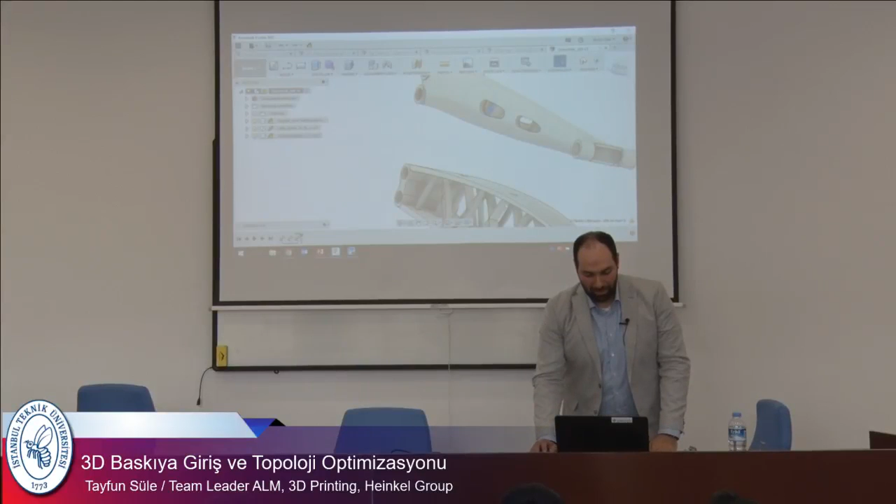And the last team, this is a bamboo structure, and if you look inside you can see there's some stiffness inside, like a bamboo rod where you have the stiffness inside the rod. The winner was this one, because the other one deforms too much, but it was quite interesting to see the different results from different teams.

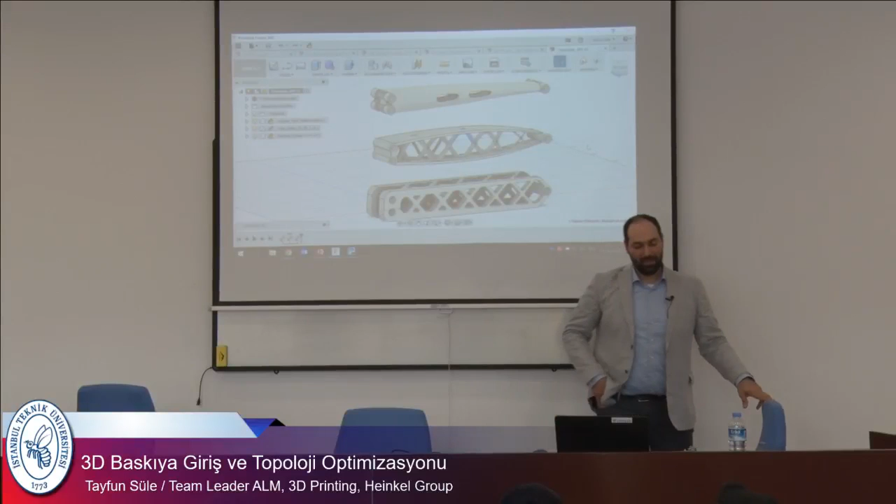And yeah, I can show you the last thing. Just a second. I don't know where it is. There it is.

And I asked again, can you build this up in CATIA? Maybe 3 days? Yeah. How long will it take to create something like this? Also 3 days? Solidworks is 3 days.

It was quite interesting because our student did it first in CATIA, and he was sitting there for 3 weeks. So now you see the result, and you can build it up. Maybe it goes faster, but he was sitting there 3 weeks to create this part.

And after he created this part, I told him, 'there's a cool new tool, maybe it could be interesting to create this, and with this other tool maybe it will be faster.' So I recommended Autodesk Fusion in this case, and he said, 'No, I just sat there 3 weeks, and I will not change anything on this part again because it crashes a lot, especially in areas where a lot of rods come together to one part - it takes a lot of time.'

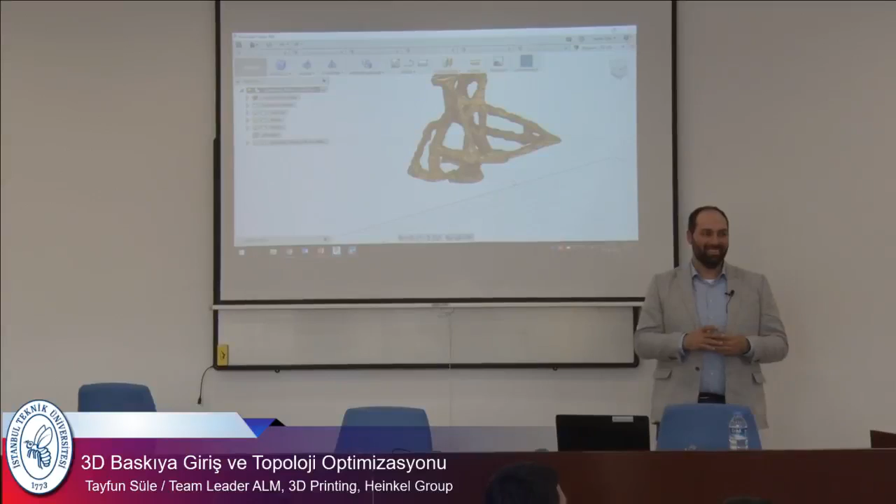Yeah, sure. Maybe you can say a few words. Okay, yeah, the microphone is here. Thank you again, first of all. Yeah, it was great - I can switch to Turkish.